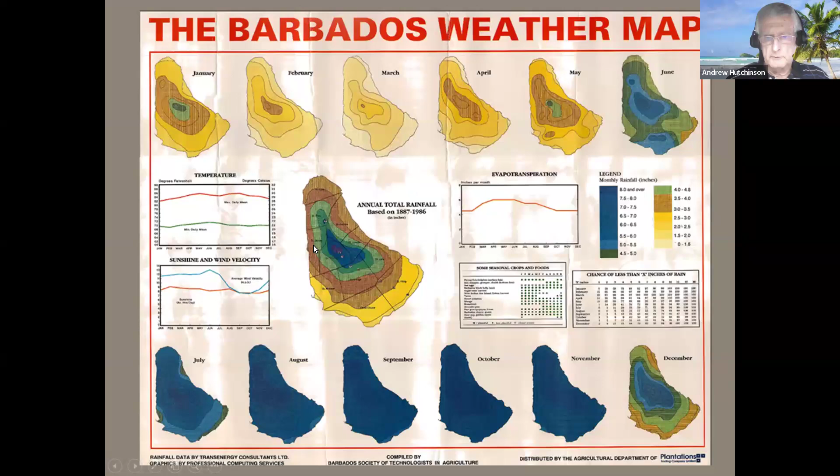The little chart in the middle shows that Barbados on the lower edges, in the yellow area, gets about 40 to 45 inches a year. The other areas get 50 to 55. In the middle dark blue areas, the higher escarpments, you get as much as 75, some years 80 inches a year. So that's a picture of the rainfall situation in Barbados.

Now let's look at some historical flooding events. Woodburn was then referred to as Sober's Bottom, but there was a major event in 1818, documented in Schomburgk's History of Barbados. Apparently rain fell for close to 3 days, and Woodburn filled up. The whole valley is a big basin with no real outlet, and it just kept flooding, with water levels rising to the point they worried it would flow west through St. George Valley and flood Bridgetown. What actually happened was that when it reached a certain level, it went east, behind Emerald City through Diamond Valley, and down onto Crane Beach via that road many of you probably take when going to Crane Beach. That happened in 1818.

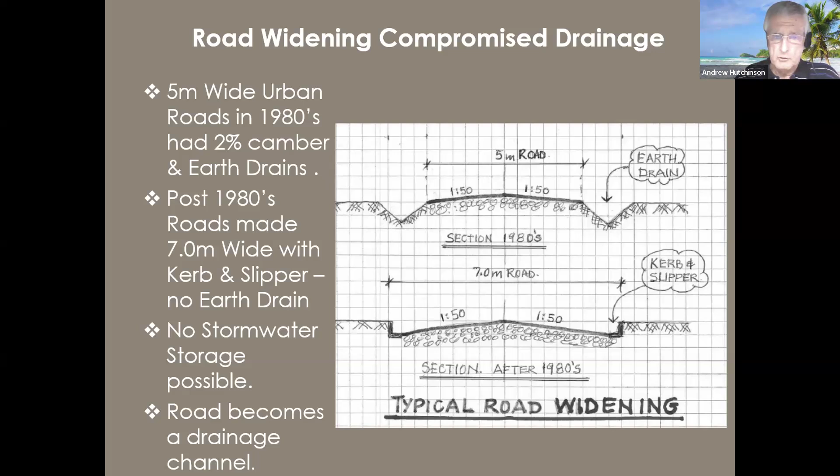Suck well infiltration rate is about 1.8 cubic meters per hour per square meter of wall area of the suck well. This came out of a Stantec study in '78, where they did hydraulic loading tests of a couple of suck wells in the Belle area. They're recommending using an infiltration rate of 1.8 cubic meters per hour per square meter.

Now this is an engineer's opinion based on the hydraulic tests, but obviously if the suck well hits fissures or cracks, it may take 10 times that. So a suck well is a very variable thing, and the engineer designing it has a judgment to make. If you want a yardstick for your design, you're probably best off using 1.8 cubic meters per hour per square meter of wall area.

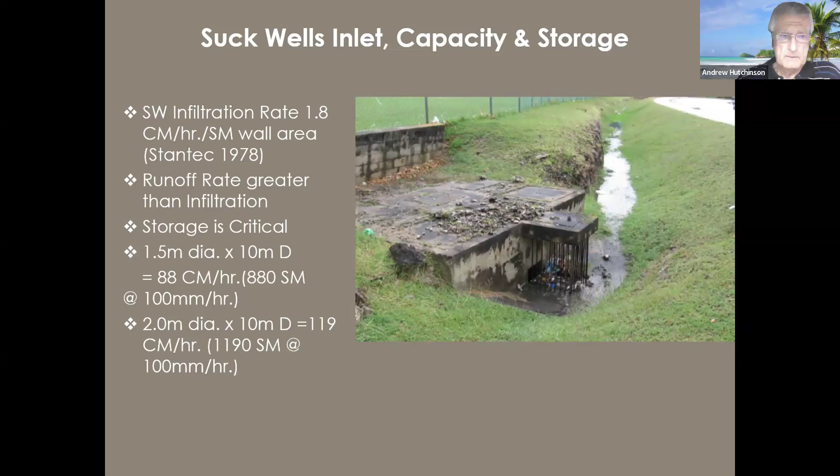To give you some kind of idea, if you used a 2-meter suck well, 10 meters deep, you'd get about 1190. A lot of these stormwater drainage facilities with suck wells I've seen have, in my opinion, been very arbitrarily selected. I don't think there's much science to it, from what I've seen. You just put a suck well in, and so forth.

Most of the water will go past, unless it's in a flat area. Most of the water flowing in the slipper will go past the inlet in the curb and not get into the box drain. Very often the box drain does not achieve efficient use of its volume because the water just goes past. I think that's a very poor solution hydraulically.

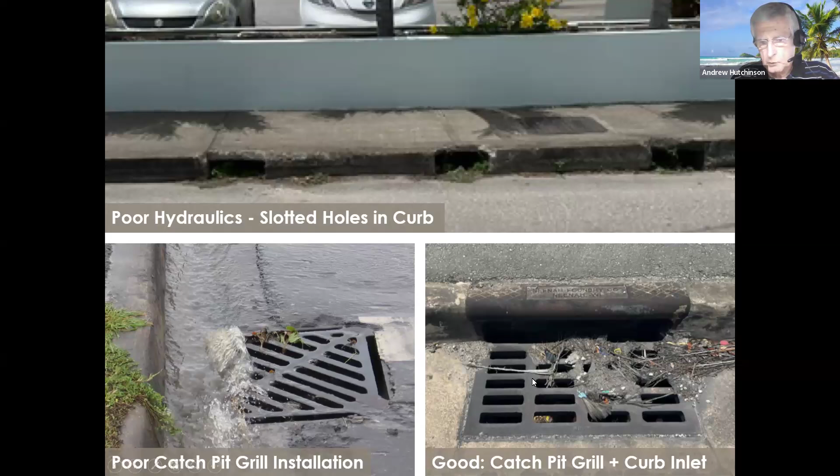On the right now, this is something Stantec actually designed on the ABC Road widening project, where we use a bigger grill and catch pit, with a curb inlet at the back. So when the water comes rushing down, we usually drop the grill about an inch and a half to give it a little hydraulic head and increase the capacity. But if the grill can't take it, it can go through that slot into the catch pit. So that is 20 times more efficient than the other situations.

But you see this all over the island, we build these little slots, which, well, I think they're a waste of time really. But anyhow, that's how it is. That's part of our cultural landscape of roadworks.

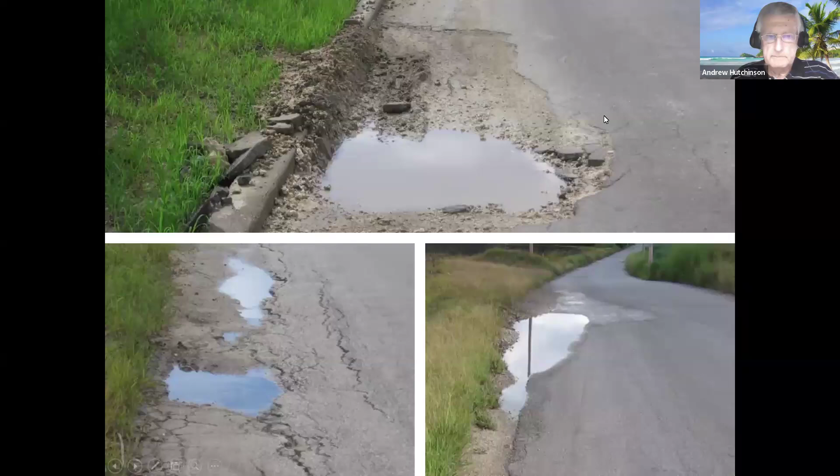Now, drainage destroys roads. This actually is Water Authority.

This is a classic example of the Water Authority fixing a burst pipe and just leaving it to rot and not repairing the road. But the other two slides below, you can see this is exactly what I'm talking about. They're very good examples. Both of these slides are up where I live in St. John, going to Massiah Street.

You will see there's no drainage. So the water comes off the road and finds a little spot here and ponds, and eventually it penetrates, it gets under the asphalt, and over a period of time it gets into the cracks, and you get progressive deterioration of these. But that is all caused because there is no drainage. Okay?

I just want to look at some basic hydrology. I think most civil engineers at university are taught about the rational method. So you work out your peak flow: C, the runoff factor for the watershed, I, the rainfall intensity, and the watershed area, and bingo, you get a flow. That is okay for a culvert, small watersheds.

In my opinion, stormwater modeling with HydroCAD should be used for watersheds greater than 10 hectares. A hectare is about 2.47 acres, so 10 is about 24 acres. If you have any watersheds and it goes over 10, 15, 20 acres, I think you should be looking at using stormwater modeling using 24-hour storms.

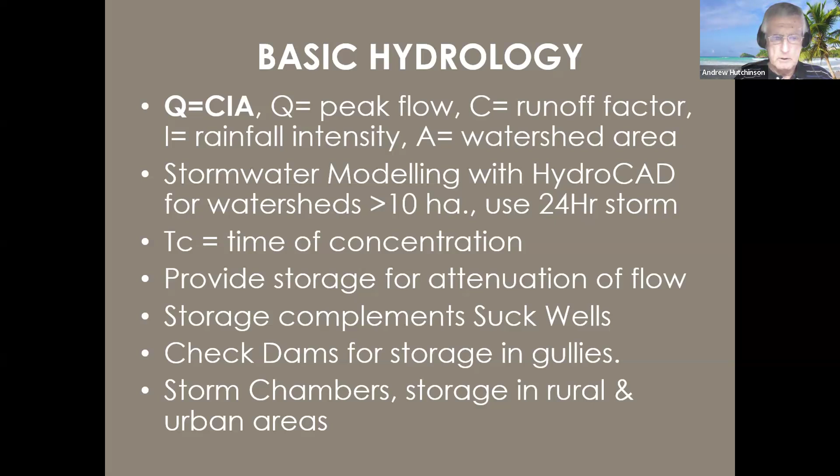Check dams for storage in gullies. I've been preaching this for at least 30, 40 years. Not much progress, but we keep plugging away at it. And then storm chambers, storage in rural and urban areas. There are not many cases. I've used them in 3 or 4 projects in Barbados, but they're not used in a widespread way. But it's one way of providing storage under your sidewalks without building an elaborate concrete box drain. I'll show you some examples later.

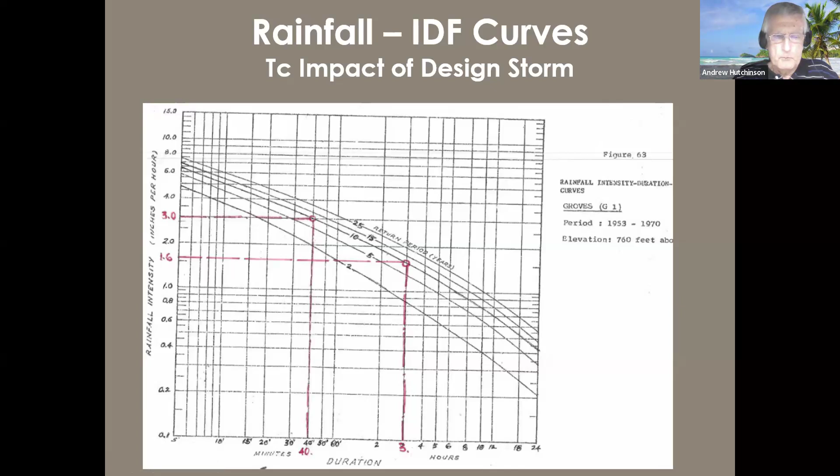It also stabilizes the road construction. And when you're finished, you can actually drive on this, cars and trucks. It's pretty good. But what it does, it helps to capture the rainfall and lengthens. This is one way of lengthening your TC.

All right, I've got to look at a few projects here. This is the Woodbourne Park. I think Vincent knows this well. This is the neck of his neighborhood. Woodbourne Park has a history of flooding periodically. I would say probably every 2 or 3 years, sometimes 4 years, but this is real flooding.

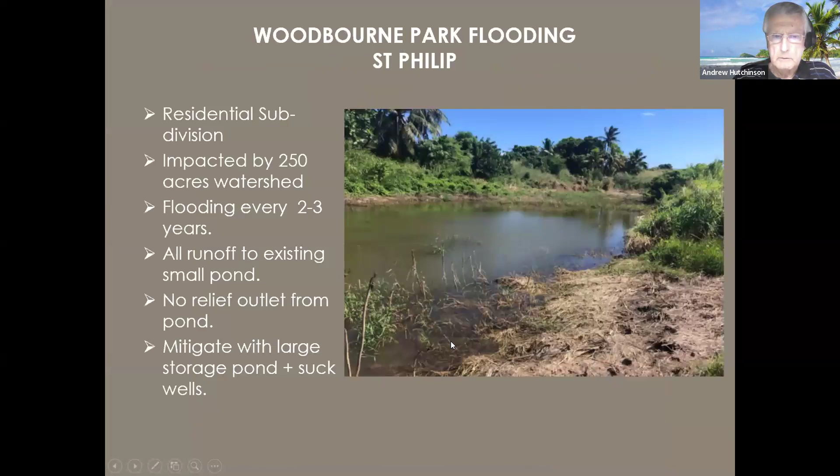Right. So I've actually done a study of it, and there's the HydroCAD model. I've used HydroCAD for this, and this is a typical example of what the HydroCAD model looks like. The hexagons are all the watersheds where you can identify each watershed and the characteristics of it, the TC, everything about it, surface quality, what it's planted in, whatever. And these watersheds all flow into a pond, P1. So in your HydroCAD model, you can manipulate that and put in all kinds of rainfall conditions. And here's a summary table above.

10-year storm, we use 145 millimeters. These are 24-hour events. And up to the 100-year storm with 208, just over 8 inches. These are the peak flows coming off. And this is the volume, and this is the pond. This is the volume of the proposed pond, and these are the top water levels that you will achieve in that pond from your model. So you see it was up to, well, nearly 29 meters. But the pond has to be large enough to facilitate storage, in this instance, for a 100-year storm.

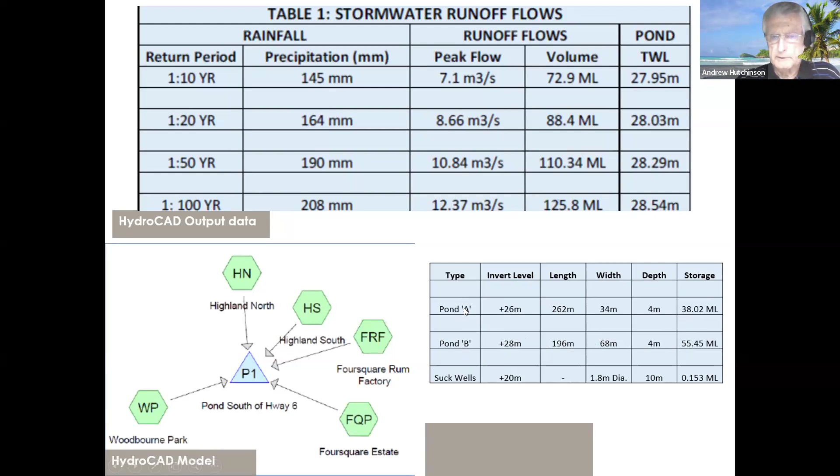This is kind of the output we get. You can see pond A is this long pond here, and we will quarry the rock to create effectively a large quarry. There's four suck wells in it. And then pond B will be an area that we recommend you could regrade, make it into a playing field for community use. But during extreme events, like a 100-year event, it will be flooded temporarily.

And this is the conclusion, the recommendation we came to protect the houses. See the houses? All these houses down here get flooded. Well, no, even a 20-year event. So this is an example of using HydroCAD for this kind of stormwater modeling.

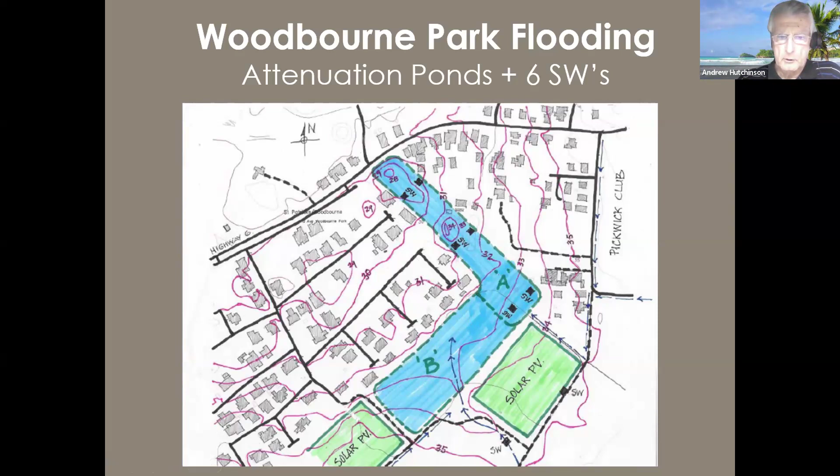I'll look quickly at the Estates at St. George. The site is about 5.2 hectares, 12 acres. And there's a watershed south of Highway 5. Those of you who know, Highway 5 is the highway coming down that you come off to go into the estates. There's a 56-hectare watershed that drains onto Highway 5 that goes through the development, through the entrance road, in fact. The existing entrance was, in fact, a gully receiving all the water coming off that 56-hectare watershed.

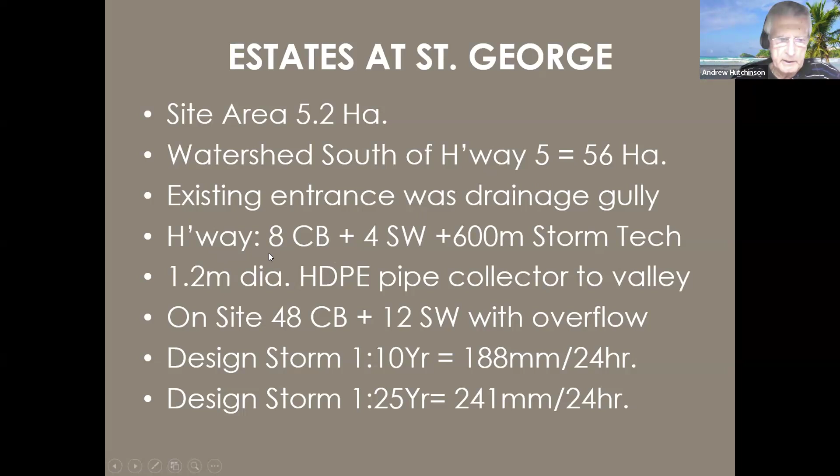So we had a challenge, and I did this when I was at Stantec. So I modeled it in HydroCAD, and I used the highway as a pond with curbs, shallow, but curbs. And the outlets from the highway were the curb inlets, 8 catch basins, 4 suck wells. And under the sidewalk on the north side of the highway, we have storm chambers to provide storage so that you can store the water while the suck wells take it.

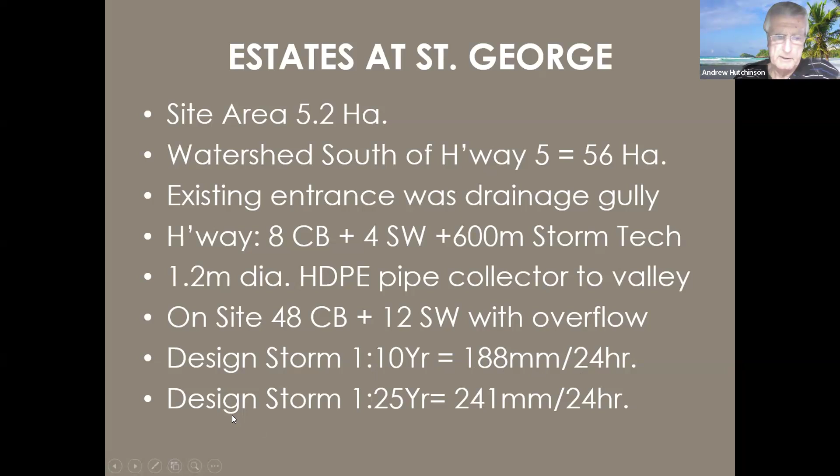And then there's an overflow facility for like a 50 or 100-year storm. There's a 1.2 meter, 4-foot pipe which goes through the site down into the valley to deal with the spillover that will come with a bigger storm. We designed for a 10-year storm, 188 millimeters per day, and a 25-year storm of 241.

This is a quick picture. Landscape architects do things that look pretty. They're nice to look at. So at the bottom of the slide is Highway 5. And this is the main entrance. So all along Highway 5, I have these 8 catch basins with grills, and I have storm chambers laid all along Highway 5 under the sidewalk.

Okay? And these storm chambers are all connected to, I think there are four suck wells. But then there's an overflow pipe at the entrance here that goes right down into the valley. So storms in excess of a 15, 20-year return period could create overflow that will go into this pipe and take it into the valley. And that pipe going down also collects runoff from the car parks and different places into the valley.

So this is the estates. I don't know if all of you have been there yet, but it's only partially built out so far. These 4 blocks here and the purple, these 2 blocks down here haven't yet been built. There are about six on this block. There are seven more blocks to be built as time goes on, and then you have the back of house down here with the sewage plant and the pond for storing the treated effluent from the plant for irrigation. But this is a snapshot of the estates.

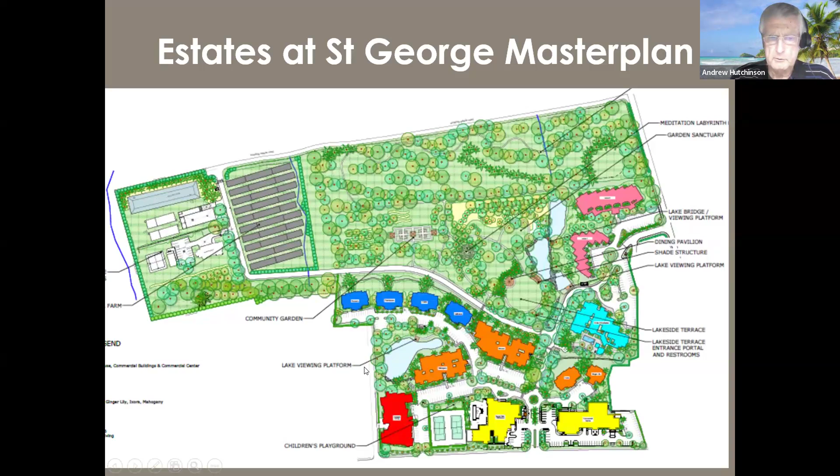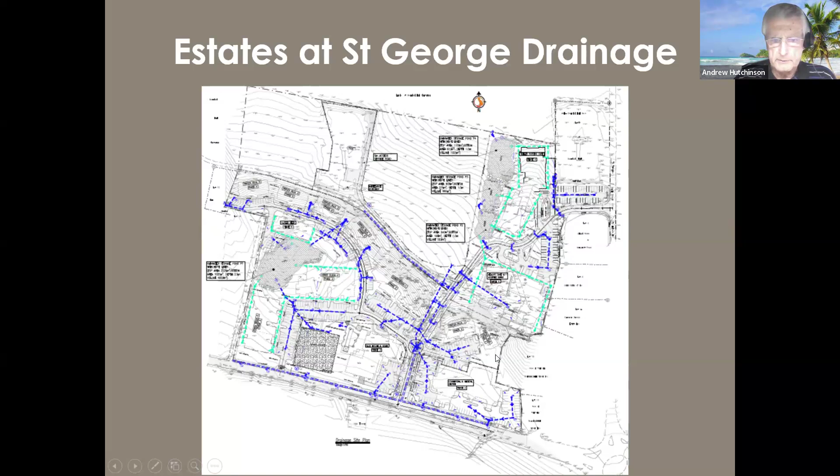And this here was the best shot I could get of the drainage plan. You see, the blue dashed lines are all drainage pipes. So along Highway 5, you have the storm chambers, and it goes into the 4-foot pipe down here and discharges in the valley. And all along here, there are catch pits with drainage pipes going to suck wells. But all this localized drainage goes into the 4-foot pipe.

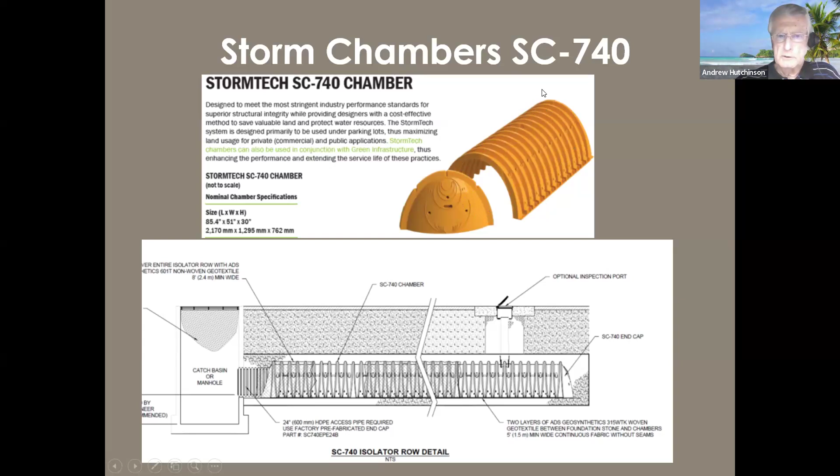Kensington Oval drainage covers 12.5 acres and 9 buildings. Runoff from the field and all the buildings is collected in 269 storm chambers on the perimeter of the field. As I said before, these are HDPE hyperbolic arches, all interconnected with an overflow, so when you get a bigger storm, maybe even a 100-year or 50-year storm, it can overflow into a canal going down to the inner basin of the Deepwater Harbor, the shallow draft.

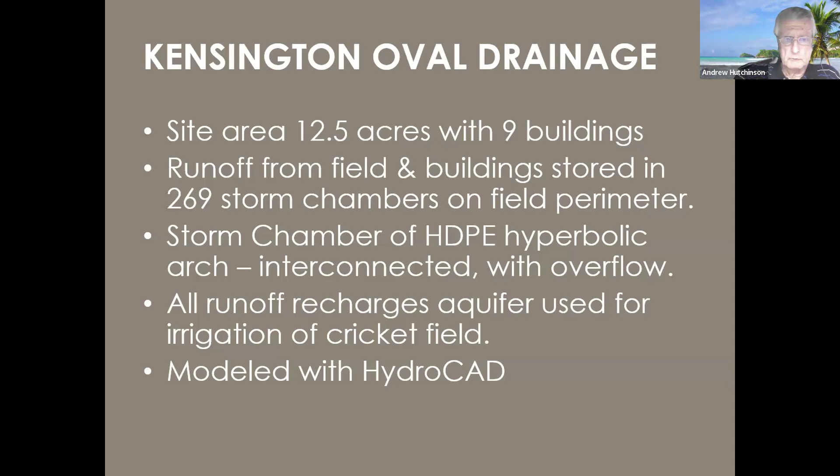The runoff there recharges the aquifer. When we did this, we did percolation tests and found the soil had good percolation rates — it was generally very sandy. We used that in our model to determine how we're going to collect, store, and infiltrate runoff from the field and all the buildings.

They're also under the field, with pipes laid radially, like spokes of a bicycle, to collect all the infiltration falling on the field. These perforated pipes in gravel beds collect the water and bring it to the storm chambers as well.

The drainage at Kensington is, in my opinion, top notch. Most people think so too, but unfortunately in this era, us engineers don't get credit for it. They just compliment how good it was, but nobody ever remembers to say who's the firm that did it.

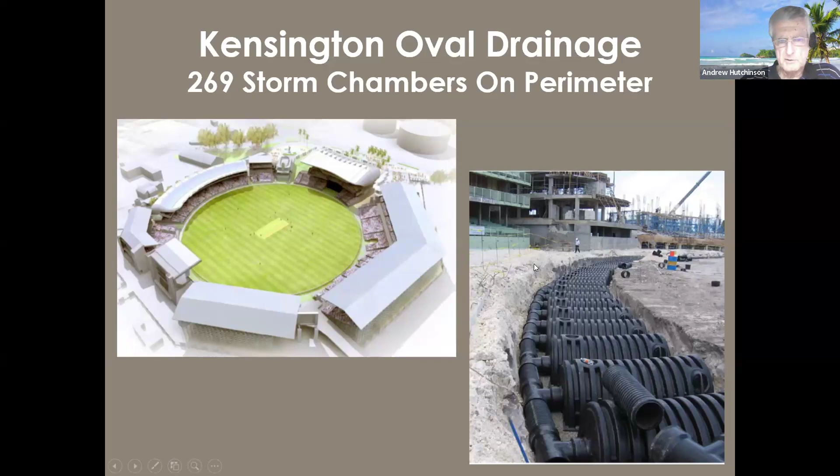Antigua, Galleon Beach — this is up by Nelson's Dockyard. We were part of a group there doing an EIA. This is perhaps the first hotel site in Antigua, from the 60s, with 25 villas. The client wanted to do a redevelopment — take out the villas and get higher density and redo the whole thing — but it required an EIA because it's an environmentally and historically sensitive site. So we were part of a team doing the EIA.

They had a watershed of close to 14.5 hectares with steep hillsides — this is a snapshot of a 10,000 map. GBR is the Galleon Beach Resort. This is the site, and you can see the steep hillside all around, going up to about 100 meters above sea level, so there's quite a bit of runoff.

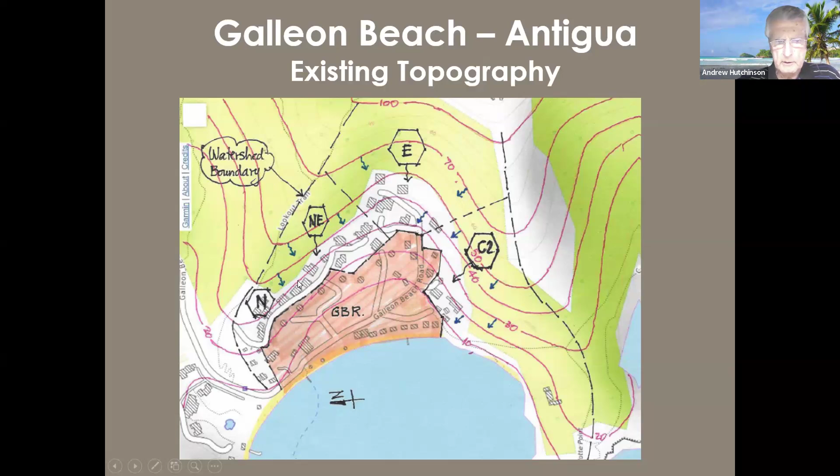This is my initial conceptual plan, looking at the topography of the site. The site actually had a low flood area, a ponding area that exists now. And noticeably down here, there's a very important cemetery, a closed cemetery, but it has a lot of historic value.

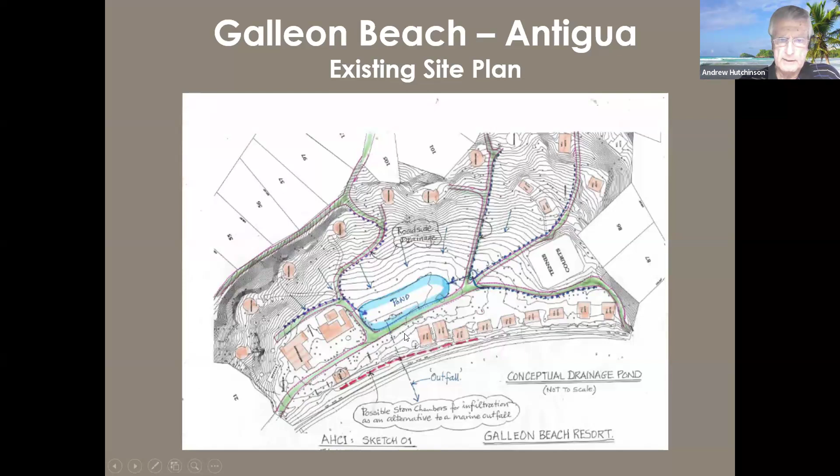Then we used storm chambers again to provide storage and infiltration into the sandy material there. Along the beach, we didn't want to do direct discharge to the sea, so at the back beach area I used storm chambers — overflow from one storm chamber comes into another and infiltrates through the sand into the sea, without having a direct discharge to the ocean. And this is the cemetery area that we had to preserve.

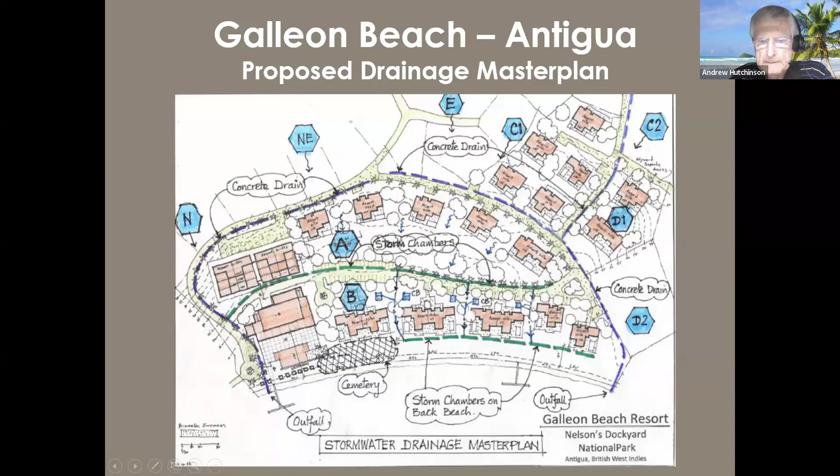There's a more recent project at Galley Bay in Antigua. An all-inclusive five-star resort has 98 rooms and 45 acres on the beachfront. The characteristic thing about it is it had an 18-acre pond on the back beach, with a watershed of 235 acres. An extreme flood event in September '24 caused significant flooding and damage because the pond overflowed and the overflow structure was not adequate, and it did some damage.

So we engaged with the client to do a study and make some recommendations on how to fix it. So I modeled it in HydroCAD.

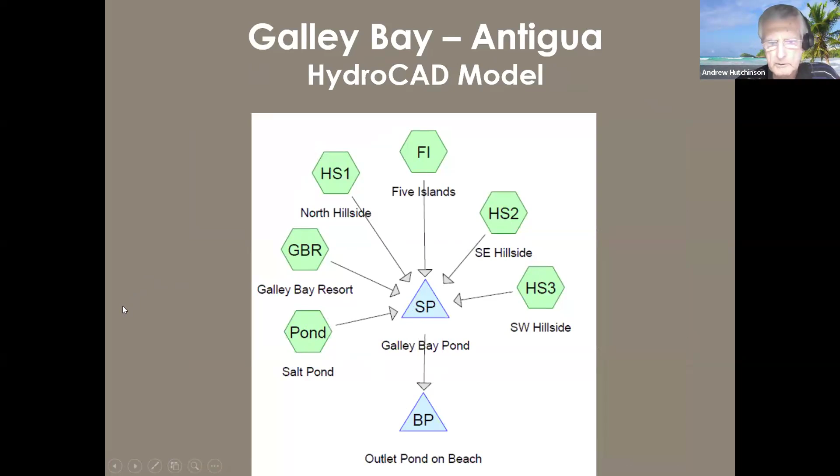So that's the kind of thing - I'm just trying to demonstrate the use of HydroCAD and solving problems like this.

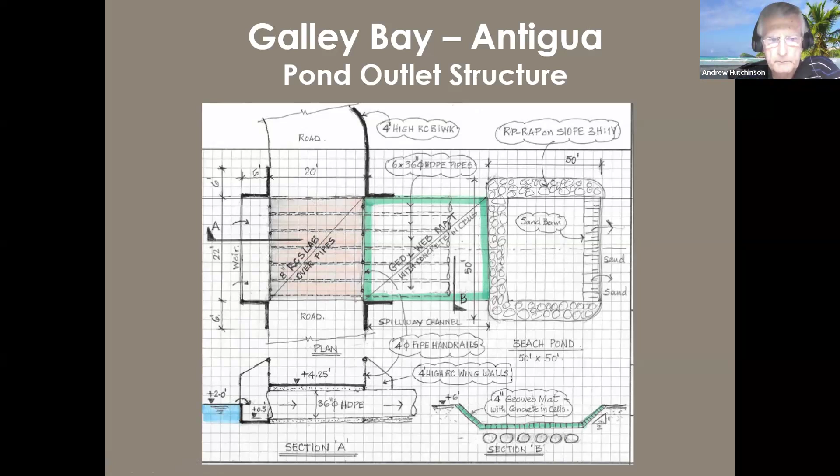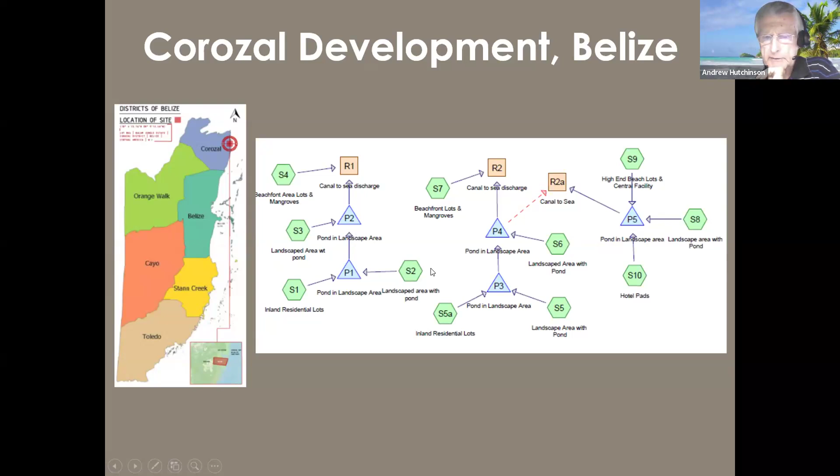And when I finished my design, we had 80 acres of ponds. But the pond was all part of the green landscaping, so it enhanced the aesthetics. But the ponds were there to mitigate the stormwater runoff from the upstream areas coming through the site.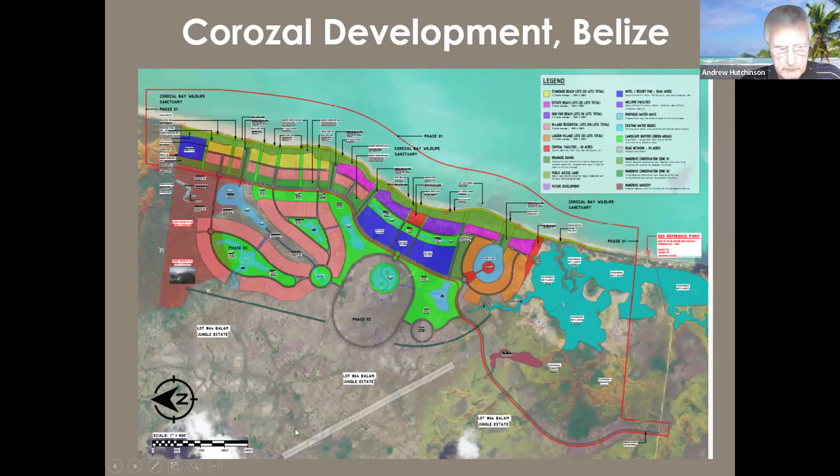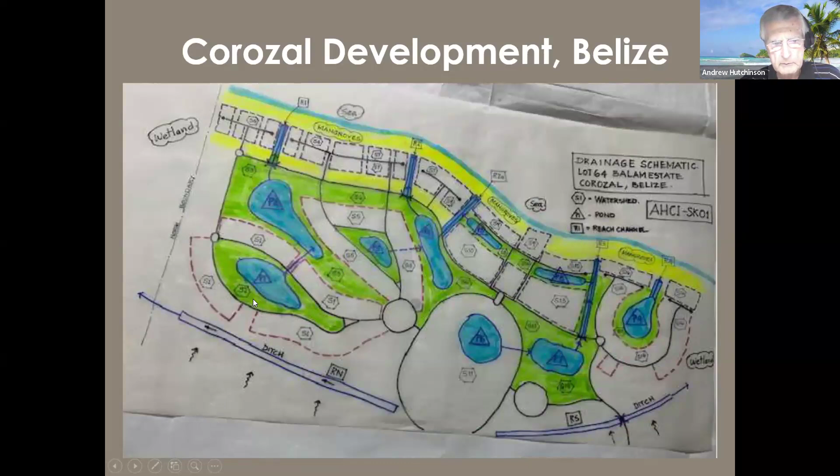This is my schematic - you can see the ponds: 1, 2, 3, 4, 5, 6, 7, 8, all kinds of ponds. And the green spaces is the open grass landscape area around the ponds. The water comes down here and we capture it through the ponds and mitigate the runoff.

I threw in a quick slide on the Charles Rowe Bridge just to highlight that there are about 5 gullies that terminate at Charles Rowe Bridge.

What happened on that flood: the total watershed is over 2,700 acres. What was unusual is they had approximately 8 inches of rain, but the rain fell over the entire watershed, and that's not normally the case. Sometimes rain falls on only part of the watershed, but when it falls on the entire watershed, you get a maximum flow problem, which is what happened that day.

So again, the solution is to go up into these gullies and build little mini check dams. It doesn't cost a fortune, but it needs to be done to mitigate this by increasing your TC, building check dams to increase storage and lengthen the time it takes the water to get from here to here. That is the only practical solution.

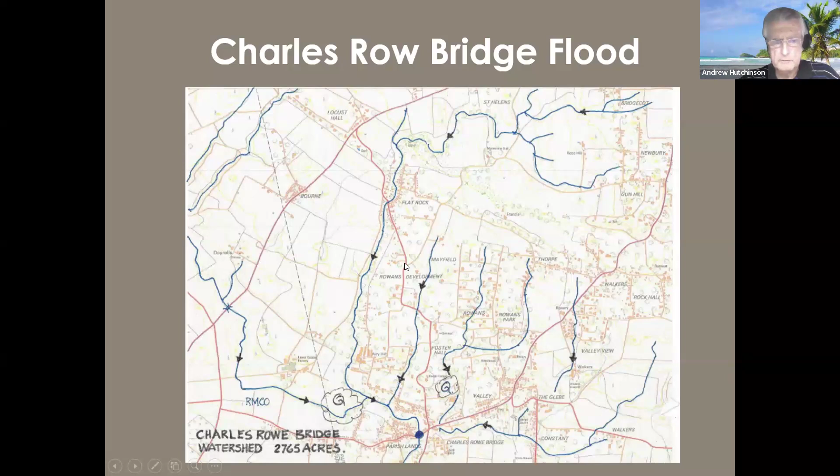I also brought a slide from down in St. Andrew, Bawdens. This is the Turners Hall watershed, 175 hectares, and the Swans Factory watershed, which I call 396 hectares. They all terminate at this point, and it's a beautiful point to build a pond. That pond could hold, I don't know, 200 million gallons if you wanted to.

And you run off from there. This is a lovely watershed. There are only probably a couple of houses up here with some farmers, but it lends itself to capturing the water for more irrigation. This is part of a study I did for BADMC, which includes three other sites, but no action has been taken. They've had these studies done but have not yet acted on them.

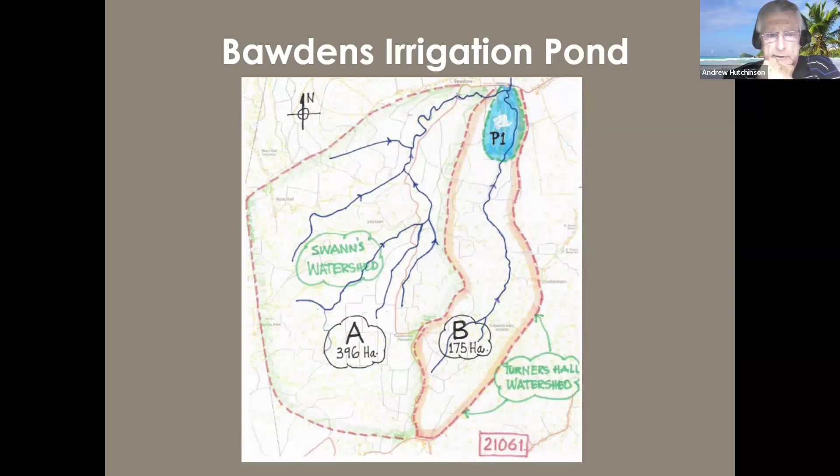I've gone over time, but thanks for listening, and any questions.

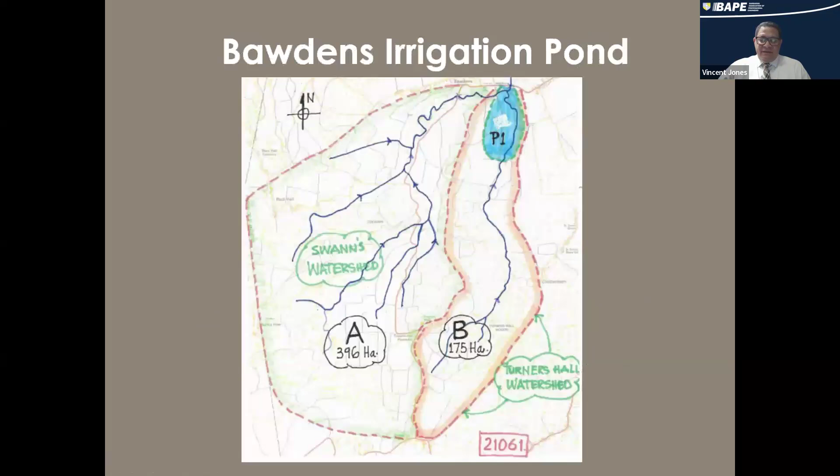Okay Andrew, we have a question coming through from Esther Joy Oisheng - I hope I got that last name correct, and if I didn't, forgive me. Based on the projects you've worked on, what have you found is the biggest challenge in ensuring that a stormwater drainage system continues to perform well after it's been constructed?

The first challenge a drainage engineer has is that most clients and non-engineers don't understand that storms come in cyclical patterns. We talk about a 1 in 5 year, 1 in 10 year, 1 in 25 year, or 1 in 100 year storm. So the first challenge when designing is the economic question: what should I design for? Should I design for a 5 year storm, a 10 year, or a 25 year? It all comes down to economics. The culvert for a 25-year storm is going to be a lot larger than one for a 5 year storm, so economics comes into it. But most non-engineers don't understand that philosophy. They think drainage is drainage, and that you should just put in one pipe and it solves all your problems.